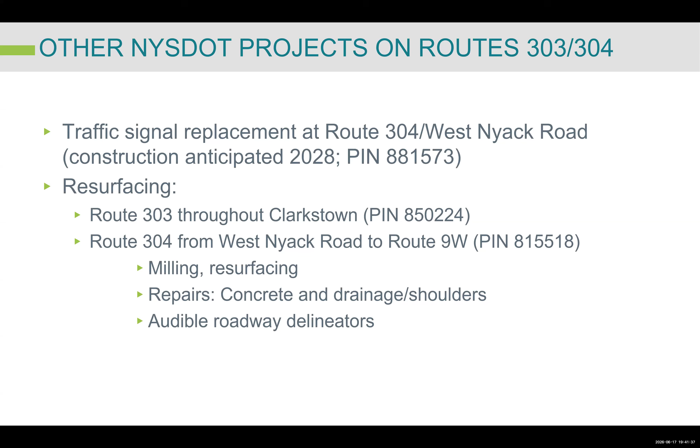And then towards the bottom, there's 2 resurfacing projects that are going to resurface nearly all of routes 303 and 304 throughout Clarkstown. 303, the entirety of Clarkstown, and 304 from West Nyack Road, which is where the freeway section coming up from New Jersey ends. So from West Nyack Road, all the way north, all the way up to Route 9W. Those will involve milling, resurfacing. There'll be asphalt surfaces at the end of that project. There'll be repairs to the concrete and drainage in some places. And what you'll see in some locations are what are known as audible roadway delineators, or what you may have thought of as rumble strips, either on the side of the roadway or in the center of the roadway. So that's also on your radar screen coming down the pike.

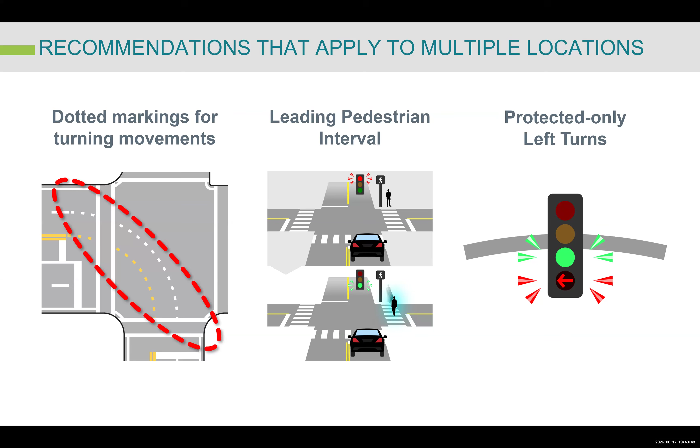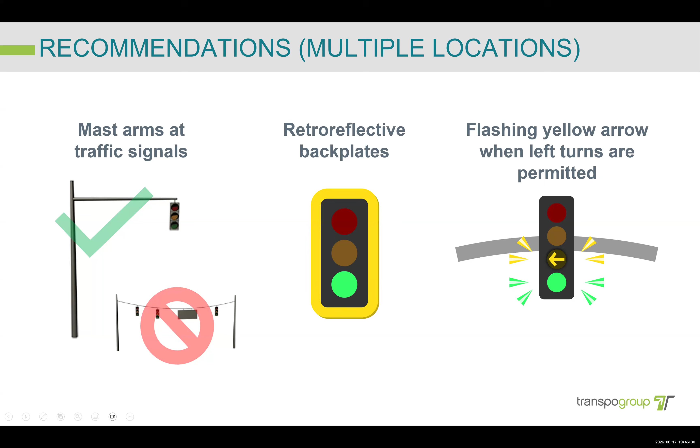Finally, over on the right-hand side, you're seeing these more and more at intersections across New York State. Flashing yellow arrows at places where left turns are permitted. So permitted left turns means you're seeing a green ball indicator and you as a driver can turn left across opposing traffic if it's safe. So you as a driver have to make a judgment whether it's safe, and these flashing yellow arrows tell the driver it's your decision. You make the judgment call when to turn left. And that also has a measurable increase in safety.

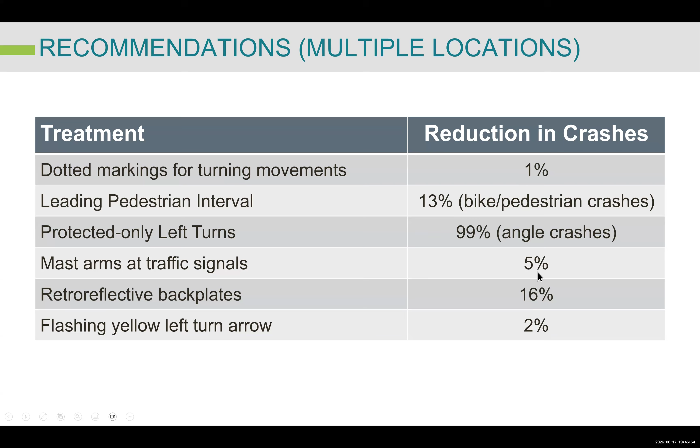Okay, a term you're going to hear again and again tonight is level of service. You'll even see the acronym LOS, which stands for level of service. This is how traffic engineers think about how congested a roadway, how congested an intersection is. And so just like if you're in school, you get a report card, an intersection gets a report card. And an A is the best and an F is the worst, but a little bit different than your school report cards. A D is actually pretty good.

So A, B, C, D is acceptable. And E and F means we have a problem. If possible, we'd like to address that problem. So anything A, B, C, even a D is sort of what we're shooting for, but an E or F is what we're attempting to avoid, mitigate, make better.

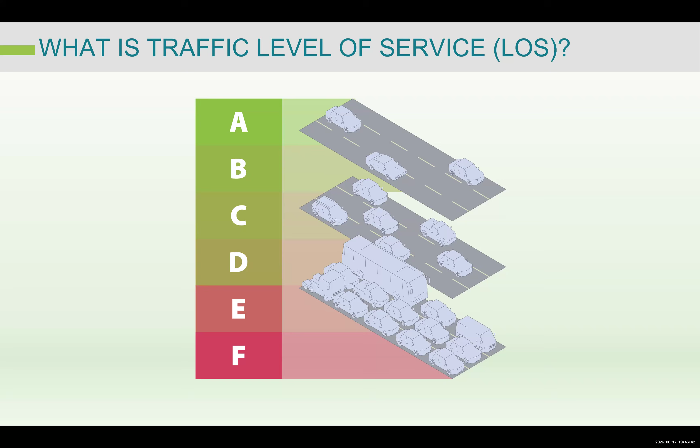So what a center median would do, there's pros and there's cons. I'm going to talk about the pros and the cons of everything tonight, but I wanted to highlight there's pros and cons of the median first. What a median would do, it prevents left turns both into and out of properties that line, in this case, Route 304, and also any minor streets where there's not a turn lane or something to break that median. So what this means is that if you would wish to turn left, either into or out of a property or a minor street, you're going to need to find a U-turn facility.

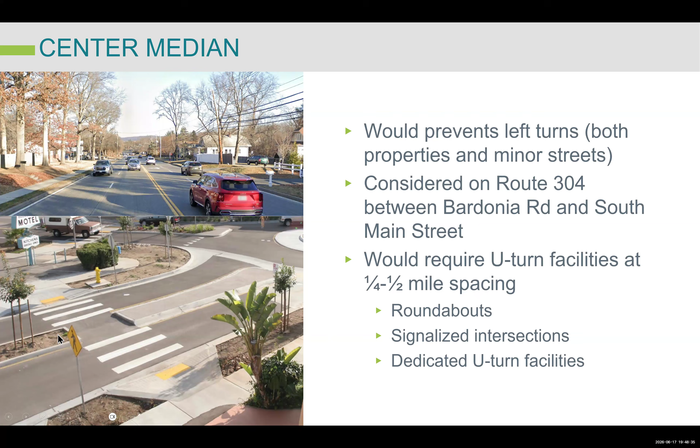Sometimes they are simply bricked or hardscape, as we say, concrete perhaps. Sometimes they're vegetated. It depends on the width. It all depends on the context. So center median is something I wanted to highlight. We'll come back to that when we talk about 304 shortly.

And then roundabouts. So I mentioned a bit earlier that we've been looking at roundabouts at a series of locations along both corridors. Every place we've looked at a roundabout, we've also looked at an option which is not a roundabout. Okay, so in no case are all our eggs in one basket with a roundabout option. But what I'd ask you all to do is understand this would be a change. There'd be a pretty substantial change to how traffic moves in these locations. There's pros and there's cons, there's advantages and disadvantages, and just have an open mind.

Listen to what we have to say about this. We're happy to talk further about it, but just keep an open mind because roundabouts do have a number of advantages. And the latest statistic that I'm aware of, approximately 250 roundabouts across New York State are under the jurisdiction of just New York State DOT. There's more under local jurisdiction, but there's about 250 and growing. Okay, so we have sort of 10 key aspects, if you're unfamiliar with how roundabouts work or how they perform.

First that I want to highlight: again, I said safety is sort of the guiding light of this entire study. Roundabouts are generally safer. They eliminate high-speed angle crashes like those left turn crashes that are really, really dangerous. It's one of the worst types of crashes. So with roundabouts, you end up with sideswipe crashes, maybe some rear-end crashes, but way fewer of those angle crashes, which are really dangerous and where lives are lost. Number two, you don't have a traffic signal. When there's a hurricane and power's out, the roundabout still works, even if the traffic lights in town are not.

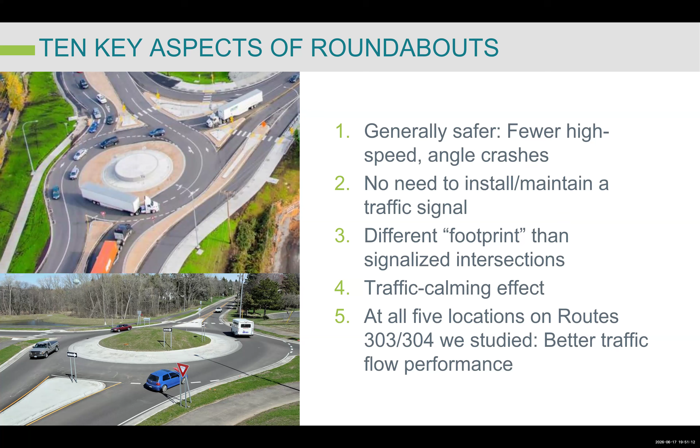And we've looked in detail at 5 locations, as I mentioned. At every location that we've looked, we get better traffic flow performance from a roundabout than from the best signal improvement option to compare it against. Okay, continuing with our top 10 list here. Number 6, it would be a pretty substantial change to the character of the roadways.

If you're interested in where else to find roundabouts in New York State, Route 67 in, I believe it's Saratoga County, just north of Albany. There's a series of roundabouts, one after another, right where Route 67 intersects with Interstate 87. Near Poughkeepsie on Route 55 in Dutchess County, there are 3 roundabouts within approximately a half-mile spacing. So they're a change in the character of the roadway, but you are seeing them for the reasons that we're talking about tonight.

Drivers need to learn how to navigate roundabouts, particularly if there's multiple circulating lanes inside the roundabouts. And at the locations we've looked at here, the traffic volumes are high enough that you would need more than one lane. These would not be simple one-lane roundabouts. You'll see that in many cases, there's 2 lanes for at least part of the roundabout. They can be established as gateway treatments, to communicate to travelers: now you've come into a place which is different than the place you have just left. Maybe you're entering into the hamlet of New City, or Valley Cottage, etc.

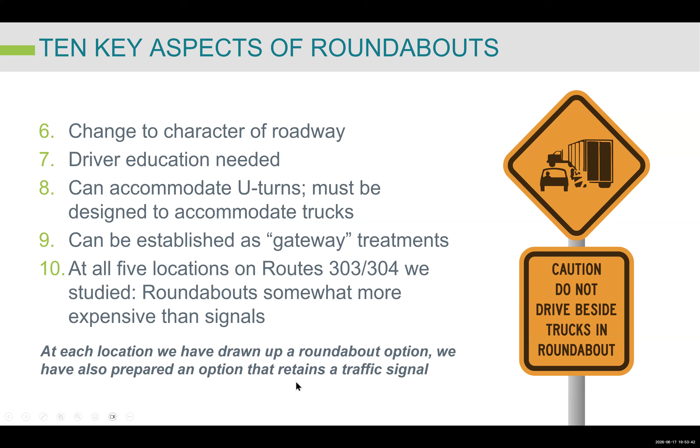Finally, at the bottom here, everywhere that we've looked at roundabouts, we found that the roundabout option has a delta in terms of cost. It's a little bit more expensive, in some cases substantially more expensive than the traffic signal alternative. So you get with roundabouts, but you also give with roundabouts. There's pros and there's cons. Just to remind everyone, once again, everywhere we're going to show you a roundabout, we're also going to show you a non-roundabout option.

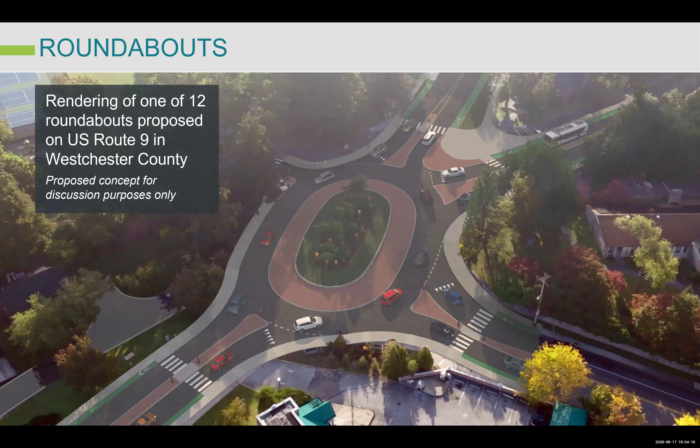Okay, what you've got here is a rendering. This does not exist yet. This is a rendering from a similar study, which was completed last year in Tarrytown and neighboring communities in Westchester County of US Route 9. And this is a proposed roundabout. It's a complicated roundabout, as you can see, 1, 2, 3, 4, 5 legs. So it's a complicated intersection. But just to communicate to everyone that the roundabouts that we're talking about here as possible future options are not different from what is being proposed elsewhere in the region and across New York State.

I'll explain in more detail when we get there, but there's this simulation of this location and for all of the other 5 locations on the website. So in the interest of time, we're not going to go through all 5 of them in the presentation, but I am going to direct you to the website. Have a look. All the videos are available up there.

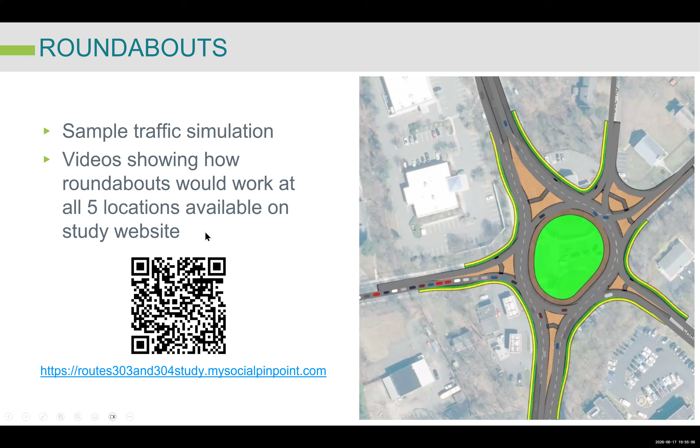Number one, the interchange. Some of the ramps are stop control. They have stop signs on the end of those ramps. There's very limited space to accelerate and decelerate as you're either entering or exiting one of the roadways at this interchange. So number one would be improvements to the length that you have to accelerate and decelerate. Again, a big safety improvement there.

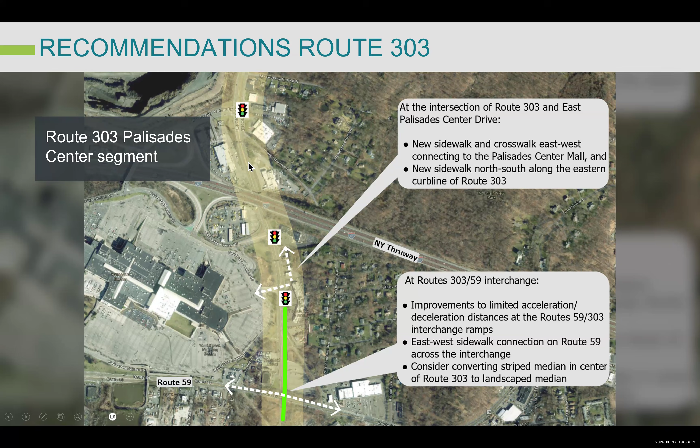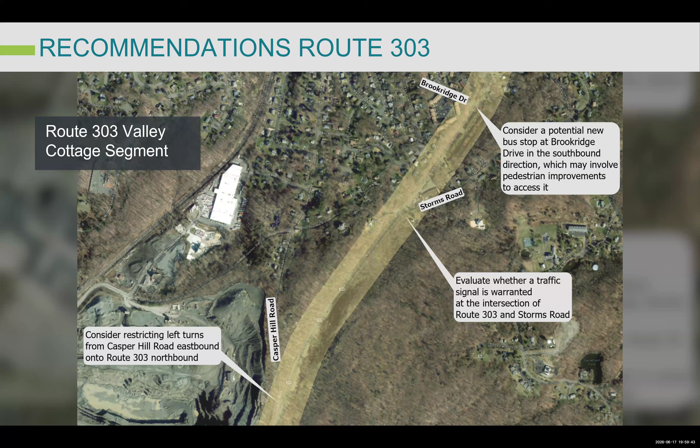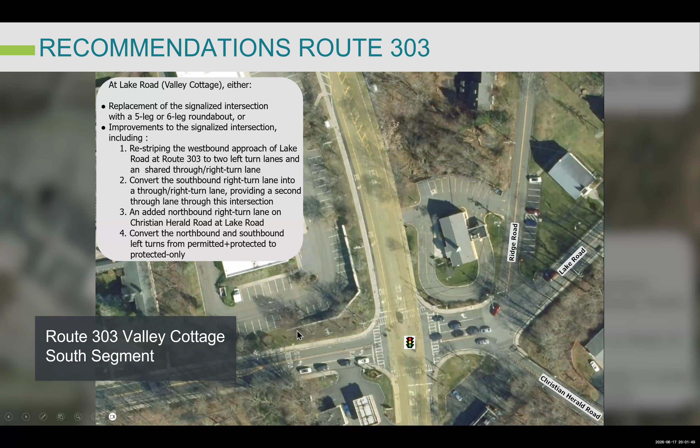You would not turn left any other time. Okay, so this is what that looks like. Let me walk quickly through this. So we have separate right turn and left turn lanes on Christian Herald Road. We restripe, not widen here, but restripe to get a second left turn lane going westbound to southbound.

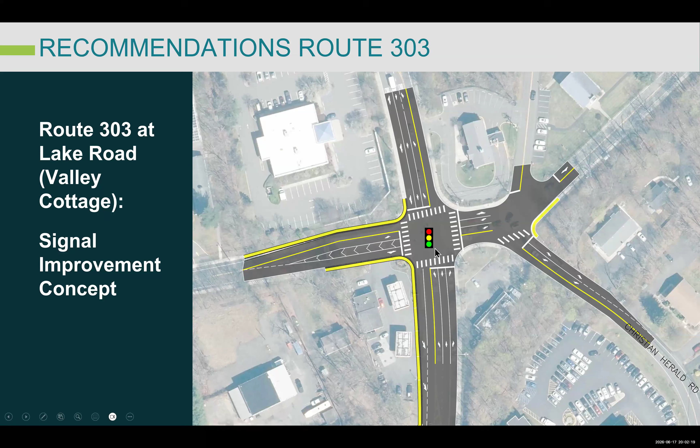We get a second through lane coming through the intersection. There's no widening here. There's a bit of widening here to get this second lane through. And we would not make changes to the final leg of the intersection. So this is what that would look like if we had just improved the traffic signal. Then our 2 roundabout options at this location. The first is the 6-leg roundabout option.

So again, we bring every one of these 6 roadways all together into one fairly large traffic roundabout. We have 2 lanes of Route 303 that carry through northbound, same thing southbound. And on the side streets, mainly it's 1 lane approaching. And again, this brings everything all together, but because it's bringing everything together, it's larger than what I'm going to flip to now, which is the 5-leg roundabout concept.

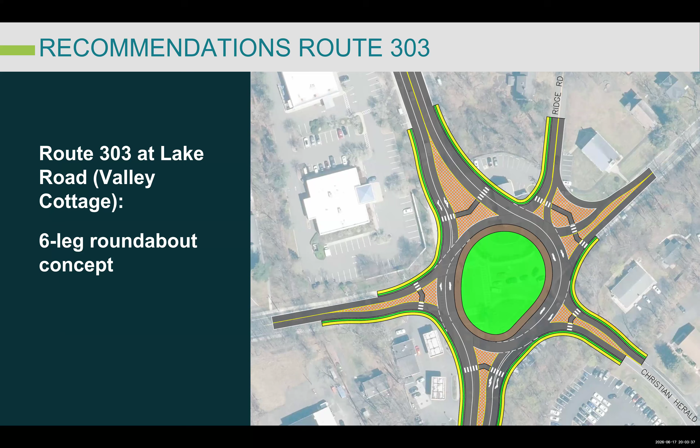Then you would not have a roadway right here. Therefore, we only need a 5-leg roundabout. It's a sort of cleaner roundabout compared to the one you see with 6 legs. Okay, so those are our 3 options we developed for this location. Now I want to briefly talk about how they would perform. So there's a lot of information here.

What I want to highlight is we began at each location looking at what is the level of service, how congested is it today? It's a D. We looked at what would happen if we do nothing, we leave everything as is and just grow traffic out to the year 2050. It would become an E at 60 seconds of delay, or 64 for a typical vehicle. Then the signal improvements option would take that E, bring it back to a D, somewhat comparable to today's level of congestion at this location. And we would get a reduction of approximately 23% in crashes at this intersection.

And our 2 roundabout options would bring us to a much better level of service, to a level of service B. So D is good, B is also good, but B is better than D. And that's what I mean when I say that at the locations that we looked at, the roundabouts just provide better traffic flow. This is during the peak hour, the busiest hour of the day, but it would also be true during the less busy hours of the day as well, because you wouldn't stop at a red light. There's no opposing traffic. You would enter the roundabout and proceed.

In terms of construction costs, there's been a lot of construction cost inflation in the past several years. Construction costs are fluid, but what I do want to highlight here is that at this planning level, we can say that the signal improvements would be a lower cost improvement at this location. The 2 roundabouts have higher costs, and actually that 5-leg roundabout would have the highest of the costs of the options here. And the reason there is because of the rerouting of Ridge Road to this new location further away from the main intersection.

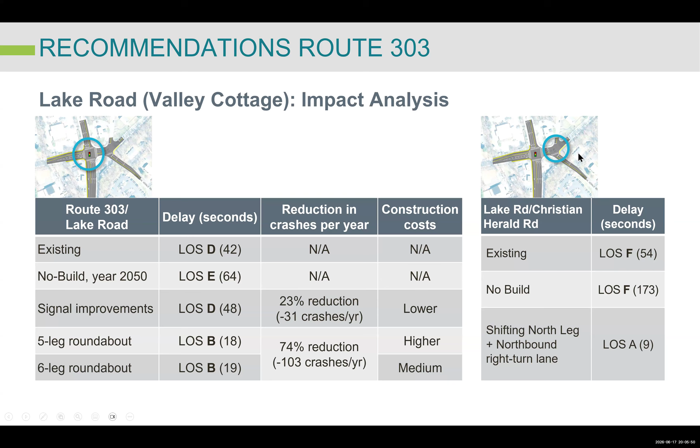Over at Lake Road and Christian Herald, we have an LOS of F today, which is the worst. It's going to stay F and get even worse in terms of delay, how much waiting you'll do. But if we move that north leg of Ridge Road and we add the right turn lane on Christian Herald Road, we go all the way from an F to an A. So those two improvements, not at the main intersection, but just at Lake Road and Christian Herald Road, have a lot of potency to improve traffic conditions at this location.

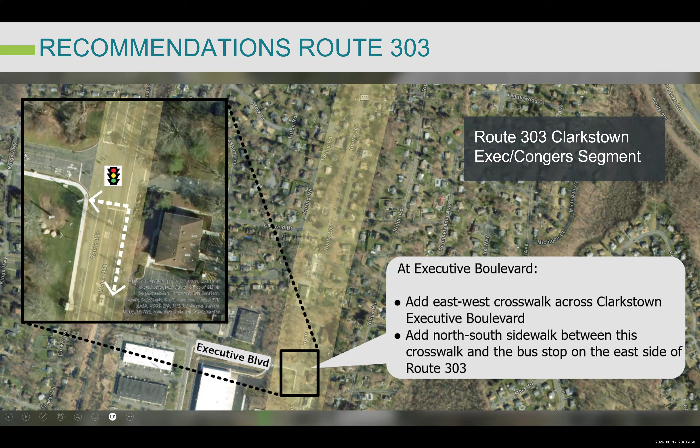Okay, continuing further north on Route 303, we're past Executive Boulevard. We're now at Gilchrest Road and Highway Avenue. There's, I believe, a community center over to the west, Congers Lake. Okay, at this location, we are recommending a sidewalk, actually a sidewalk that would run continuously through this section, further north of this intersection, along the east side of Route 303.

We're recommending crosswalks across all four legs of this intersection. We're recommending a connection; there's a bus stop up here, a bus shelter. So a sidewalk connection to that bus shelter from the intersection. And then a continuation of the sidewalk along Gilchrest Road to the west, connecting to the community center. So right now, you don't have a safe way to walk on this side of the road to the community center. This would provide that along Gilchrest.

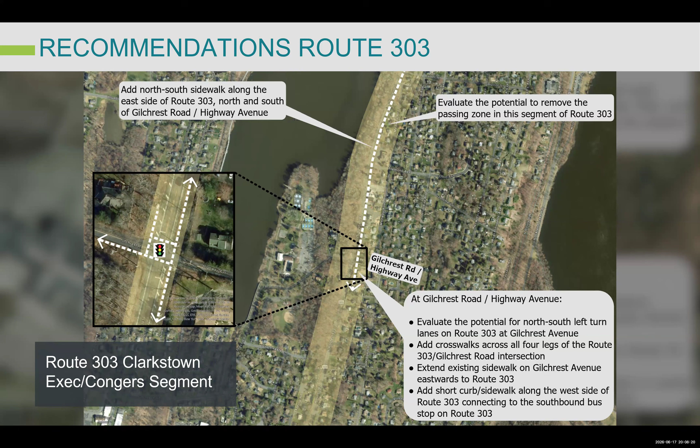Further north, past Gilchrest and Highway Avenue, we were a little bit surprised the first time that we got out and visited the corridor. You have a passing zone in this stretch of Route 303. That passing zone would have been implemented many, many decades ago when the land uses were very different. The amount of driveways were very different. The traffic volumes were very different. And so, you'll have to do a detailed engineering study, but what we're proposing at this point is to reconsider whether a passing zone is appropriate. Really, it's here, and you're also going to see the same thing further north along Route 303.

Okay, so we're moving further north now once again, and now we are at the top of Congers Lake. We are at Lake Road in Congers. And here what we are suggesting is a sidewalk connection to a bus shelter along the west side of Route 303. Crosswalks where there are no crosswalks across all three of these legs of the intersection.

And then what you see in green, this dashed arrow here, would be a cycle lane, a way to cycle safely east-west from Congers Lake over towards Route 9W. So our remit was we focused on the 303 corridor, but we identified this as an opportunity for a location to improve east-west connections for cycling as well.

Finally, I want to mention up here at this intersection, we looked at various options here that would take left turns away from this intersection, move them up to another intersection with Hemenway Lane, which is the next street to the north here. We've also looked at the option of adding left turn lanes. So at this intersection, there are no left turn lanes north and south along 303. You come to the traffic light, and if you're turning left, you are in the through lane. So the recommendation here is consider both northbound and southbound left turn lanes at this location.

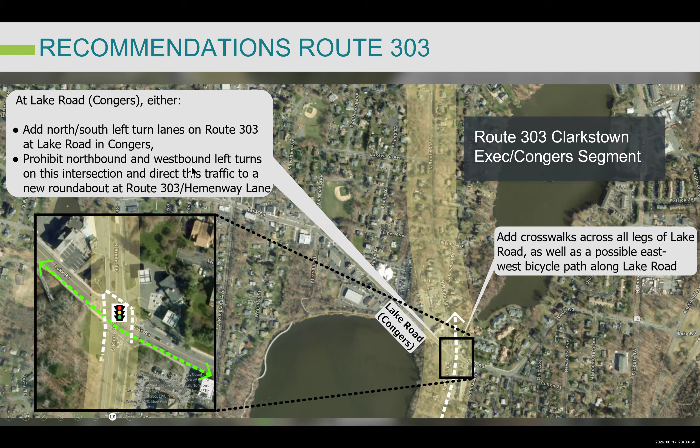Okay, then we are nearly done with 303. We're at the very north end of Route 303. There's a lot going on here. There's even some land use proposals that many of you may have heard of. In this part of Route 303, we have some light industrial uses. So this is the Congers North segment.

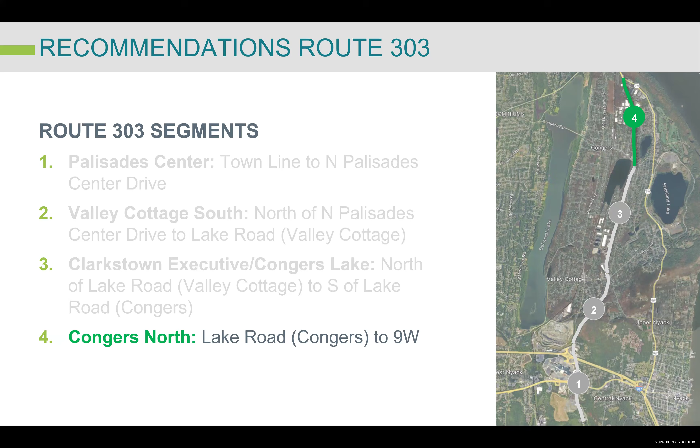First item I want to highlight here is we get to an intersection with Hilltop Road and Randi Lane. Hilltop Road to the left, to the west of Route 303, Randi Lane to the right. Here you do have a crosswalk. But what we're recommending is to consider upgrading that crosswalk to what you see here. This is called an RRFB, a rectangular rapid flashing beacon.

What that means is, as a pedestrian, you press a button to cross that crosswalk, and immediately, without delay, strobe lights start flashing yellow to tell drivers, not only is there a crosswalk there, but there is someone right now crossing that crosswalk. So that's the type of treatment that we're recommending you consider at Hilltop and Randi, again, to make it safer and more accessible to get across the state highway.

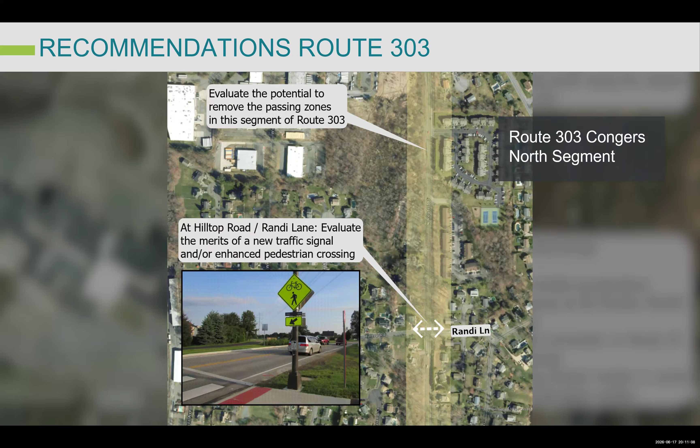As we get further north, once again, we have more passing zones on this stretch of Route 303. We're recommending reconsidering whether those passing zones fit the current land use context. You have condominium development up there, a lot more land use, a lot more development than the last time this roadway was considered.

Okay, now we're up towards the very final stretch of Route 303. We're at Brenner Drive. There's a painted median on both sides of this Brenner Drive intersection. We're recommending, like some other painted median locations, consider a landscape median. It's a beautification initiative, a stormwater management initiative, a sustainability initiative. So consider that there. There would need to be further study, but we're recommending to evaluate the merits of a traffic signal at this location. Currently, there is no traffic light at Brenner Drive.

And what you see in white along the east side of Route 303, this would be a recommended sidewalk connecting this residential neighborhood down here with Hemlock Park just to the north. So a safe way to get up to Hemlock Park, not walking in the shoulder, but walking on a sidewalk. At Brenner Drive, we would also recommend considering crosswalks across the various legs of this intersection. And there is no bus stop immediately in this area, so we'd recommend considering a shelter, considering a stop location to serve these major employment sites.

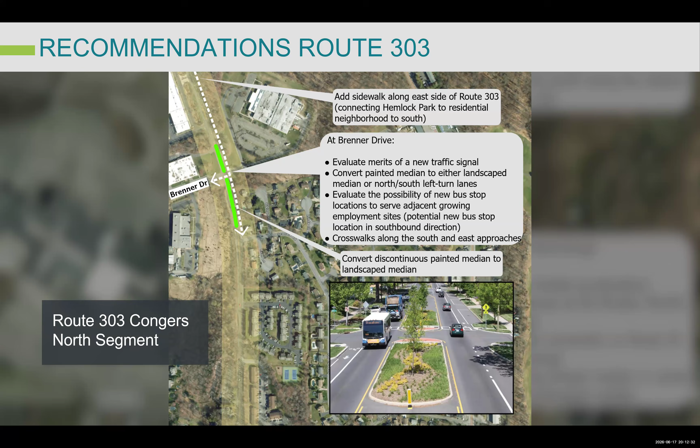Okay, continuing up towards Hemlock Drive, Meola Road, and ultimately this is Route 9W over here, so the intersection with 9W. I'm at Hemlock Drive, and we're aware there was another fatality earlier in 2026 at Hemlock Drive. We're recommending here sidewalk on the east side, crosswalk, and then sidewalk on the west side to get from a bus stop into this employment center.

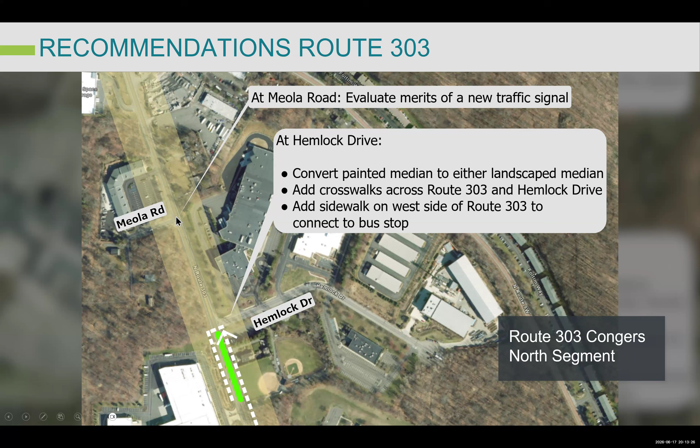Over at Meola Road, which is the final intersection I'll discuss on Route 303, there's development that's proposed, Cedar Corners, in this area. I know that that's under review by the town at the moment. So our recommendation is consider this as a location for a potential traffic light if you're going to provide access to more intense development at that location. Okay, I'm going to pause for a moment, and then I'm going to move along to Route 304 and talk about what we're thinking on 304, going from south to north once again.

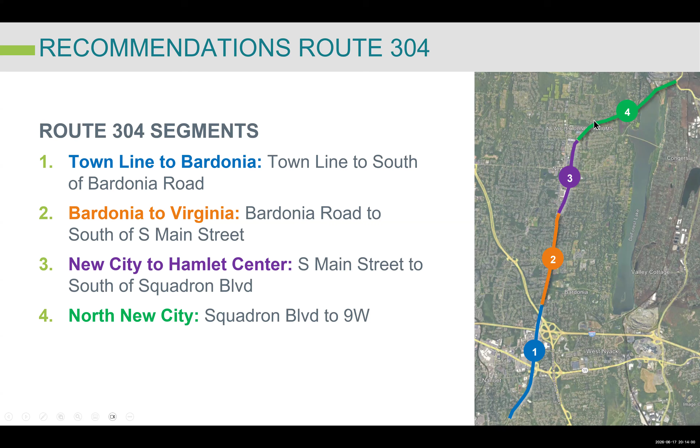Okay, so our 4 segments of Route 304: the town line on the south to Bardonia, where we begin with the freeway section, and then we transition at West Nyack Road into the surface roadway. Bardonia to Virginia, which is, in my opinion, one of the more challenging sections of these roadways. We'll go through the New City Hamlet Center, and then finally North New City, all the way up to the connection to 9W. Okay, so we're going to start out all the way at the south once again. What you're seeing right here, these are the ramps that connect down to Route 59. West Nyack Road, again, 3 fatalities at West Nyack Road.

At West Nyack Road, we are not making major recommendations here because we know that there's a state study coming down the pike. What we are recommending is consider sidewalks along West Nyack Road, consider a crosswalk across West Nyack Road north to south. And we think that the state will be evaluating the merits of protected only left turns north and south. Currently, you can turn left, north and south, when you have a green ball. It's a driver judgment decision. Our analysis is that you may ultimately decide that it's safer to convert to protected only left turns, but we're not making that recommendation. That's to come as a piece of future work.

Moving further north, there's a series of car dealerships on Route 304 here. Up at Demarest Mill Road, we're recommending sidewalks along Demarest Mill Road to connect some of these commercial properties over to Route 304. And there are right turn lanes as you approach this intersection, both northbound and southbound. They don't get a ton of use. We've counted the traffic out there. So we think that there's merit in rethinking those right turn lanes, putting them into a shared lane with the through traffic. And that allows you to narrow down what's currently a very, very wide roadway to cross if you're a pedestrian, to make it faster and easier to get across on foot.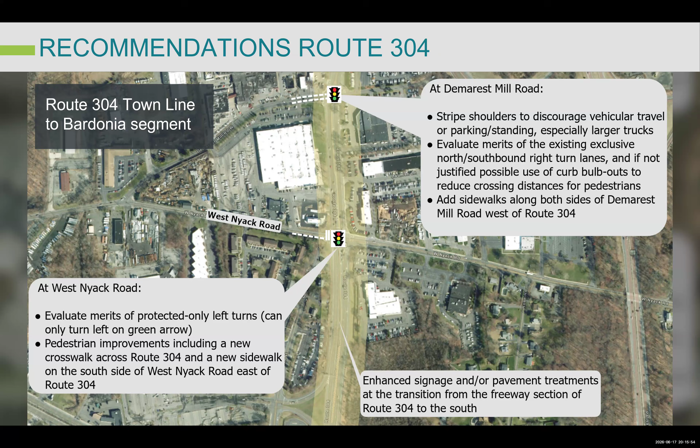We would do this with what we call curb bulb outs. That means at intersections where we have a pedestrian crossing, bringing the curbs closer together. Traffic lanes can get through, but there's not a wide shoulder at those locations.

Okay, moving further north, here we are near Village Green and Dustman Lane. This is also a challenging location. So here, there's busy traffic. It's a 5-lane section. There's 2 lanes in each direction. There's a center turn lane. There's businesses. There's condominium developments. There's a lot of activity in this area.

However, neither at Village Green, nor at Dustman Lane, nor anywhere else is there an optimal place to place a traffic light. We didn't find a single location where we could justify combining access into these multiple properties, these multiple streets, into a single traffic light.

Therefore, a recommendation here, this is a long-term recommendation which would take many years to come to fruition, is to consider, as these individual properties redevelop, some type of a district approach to access so that instead of every single property going directly onto Route 304, there's shared access, and maybe then you have the traffic volumes that can support a traffic light.

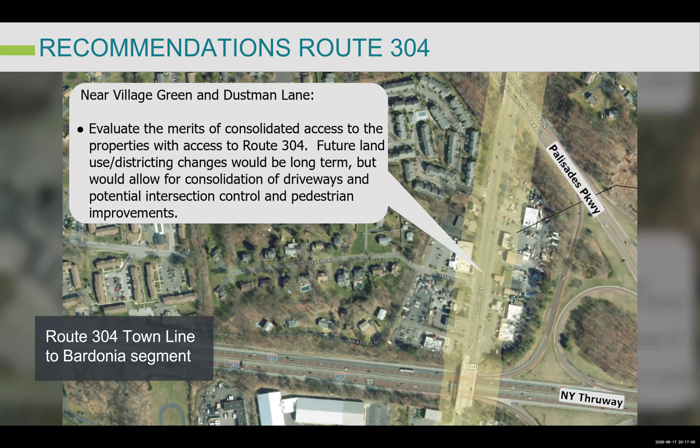You don't see a drawing of improvements to the traffic light because at this location, we would improve the traffic light in various ways without changing the pavement. So we wouldn't be adding lanes or changing any lanes. We would be simply changing how the traffic light works, those mast arms, etc.

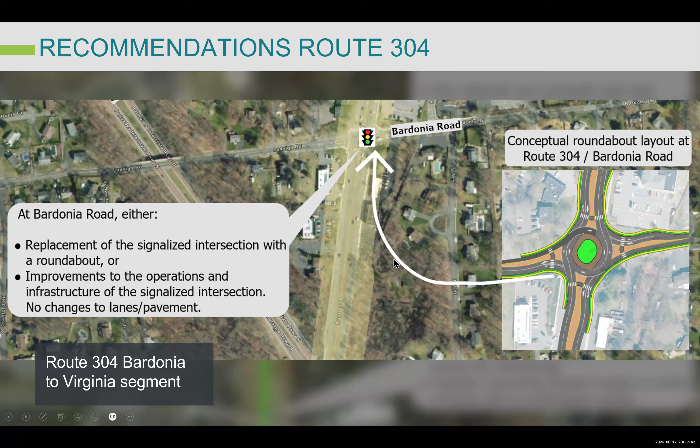Okay, so here's what that roundabout at Bardonia that we've drawn up would look like. CVS over in this corner of the intersection, 2 lanes through the intersection, both along 304 northbound and southbound, 1 lane through eastbound and westbound. So if you're going from 304 north to go west on Ludwig Road, you would be in this lane. You would travel through like this. Okay, so that's an example of the trajectories that you would follow as you go through the intersection.

In terms of safety, you get a safety improvement from those various improvements I talked about earlier, the reflective backplates, the yellow flashing arrows, etc. But you get a much larger benefit in terms of safety from a roundabout just because every driver is forced to slow down as they enter that roundabout. And here at this location, the roundabout clocks in as the higher cost of the 2.

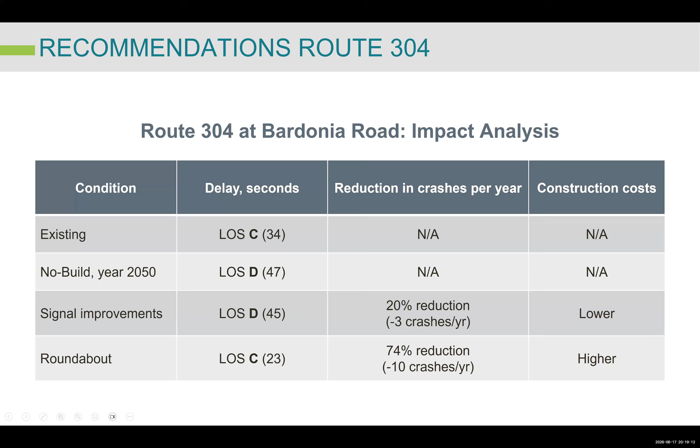It would be a trailway. It might be something like a 10 to 12 foot wide trailway. There's actually a power line right of way, a strip of land that carries electric lines, and that's what would be the host for this trailway. So that's the first thing that I want to highlight, a brand new connection for anyone that lives in this neighborhood over to Germonds Park without having to loop all the way around to the other side of Germonds Park.

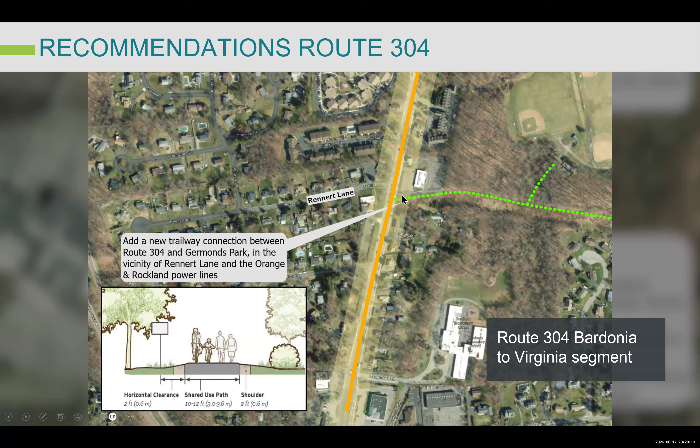Next thing I want to highlight in this section, you see in orange, that line running right down through the middle of the roadway. This is where we are recommending that you consider a median. So again, the downside of a median is that property access becomes more difficult. You can only turn right into access properties or right to leave properties. You're not turning left. It's more dangerous to make those lefts, so the median simply prohibits it.

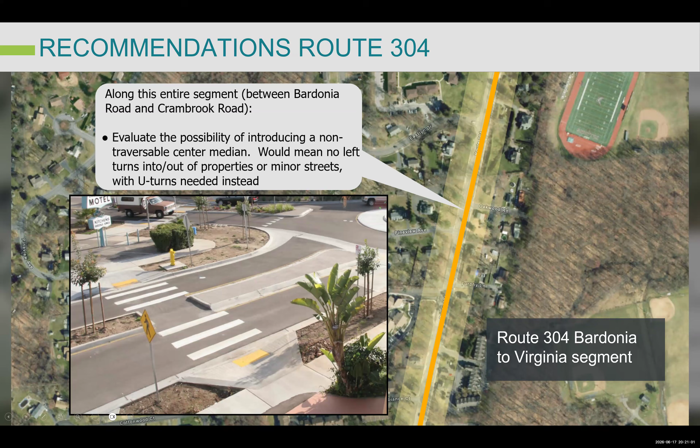And instead, you're going to some sort of a U-turn facility. Either it's a roundabout or it's a traffic signal that can accommodate them. Or in a moment, I'll show you another way that you could accommodate U-turns. But this has the downside of what it means for access. It has a big, big advantage in terms of what it means for safety. Okay, so in this section, there's no turn lanes. You're turning left from the left through lane.

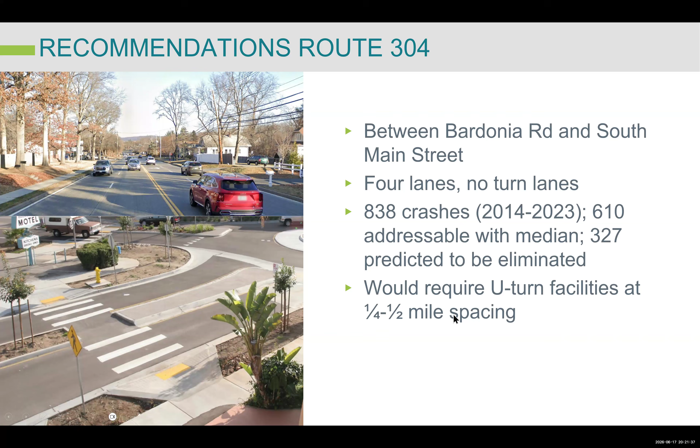We counted a total of 838 crashes through this stretch where we're proposing a median. Out of those crashes, approximately 600 would be addressable, are the types of crashes that a median would address. And approximately 300 is forecasted to be eliminated. So something like 300 crashes avoided of those 800 that we saw. So pretty powerful in terms of safety, and that would be the motivation. So again, you'd want U-turn facilities. The standard is something like a 1/4 mile to a 1/2 mile spacing. Could do it with roundabouts, could do it with traffic lights.

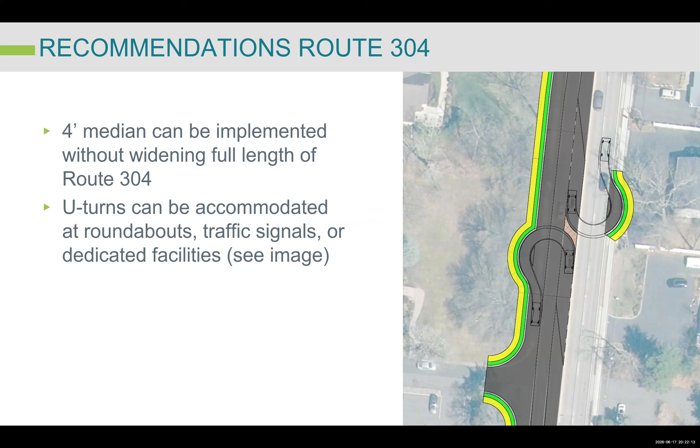Here is another way that you could do this. And if you want to see something that looks like this, have a look in Orangetown near Erie Street. Median was introduced with exactly this sort of a U-turn treatment. It allows passenger cars to turn around. It's sized only for passenger cars. So if you're a truck or anything bigger, you have to find some other way to make a U-turn because otherwise this would be a much bigger circle. But this would be another way to provide for U-turns without introducing roundabouts or without making the traffic signals wide enough to allow U-turns.

Okay, so we are now at Germonds Road. This is the next major traffic signal along Route 304. We've passed Monterey Gardens. We're now at Germonds Road. At Germonds Road, we're proposing one of two things. Either it's a roundabout or it's the signal improvements you see in the drawing on the top left. So the roundabout, there's a lot of lanes. It's big. It would take a lot of land. We've adjusted the route. We've shifted around to attempt to minimize impacts to properties, but it's unavoidable.

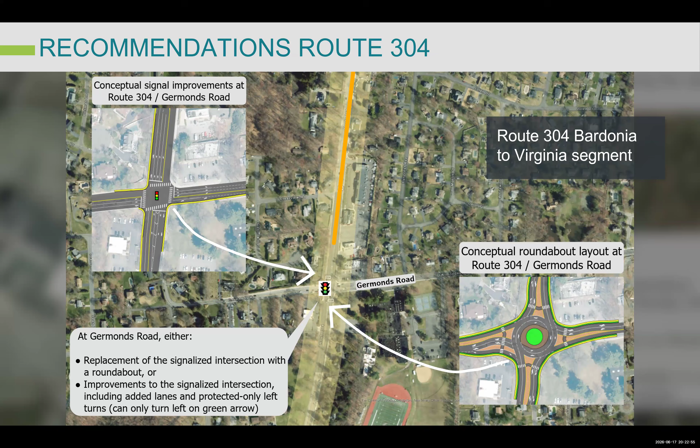It would take space. The traffic signal improvements, let me jump to that and I'll walk through what we're talking about here. First thing is we analyzed the left turns at this intersection and came up with a recommendation to make all 4 left turns on all approaches protected only. So you only turn left when you have a green arrow, not any other time. This is a trade-off as well, lots of trade-offs. The trade-off here, much better for safety, but it's a bit more delay because you're always waiting for that green arrow.

So what we would change on the ground here, a second left turn lane going southbound, coming from New City and turning to go towards the schools, towards the east on Germonds. So right now you have 1 left turn lane, there would be 2. Second change would be a second through lane coming down the Germonds Hill, approaching the intersection and going through the intersection just far enough to get through the intersection and then merge back down to a single lane. So this would get 2 lanes through the intersection, additional turn lane for southbound traffic, and that would address the additional congestion from making all these left turns safer through protected only.

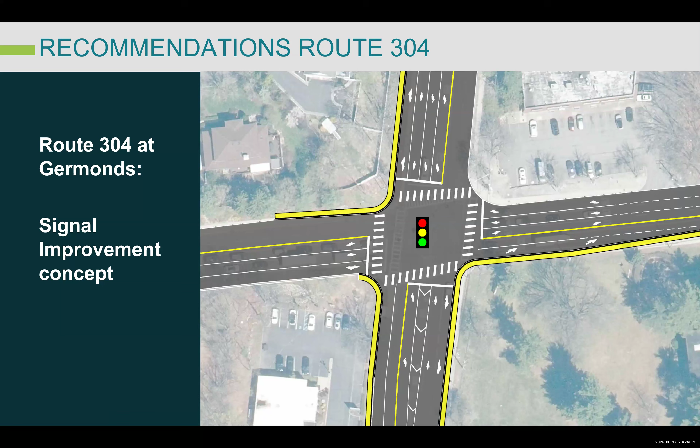And I want to flag for everyone, we're aware that at this location, there's lots of school bus traffic, there's lots of truck traffic, so we're really aware that there's a lot of special conditions of traffic at this location. Okay, the roundabout that we've drawn up at this location, there's commercial properties on the northeast, southwest. There's Albertus Magnus High School to this southwest, southeast side. Then there's homes, there's residential properties to the northwest.

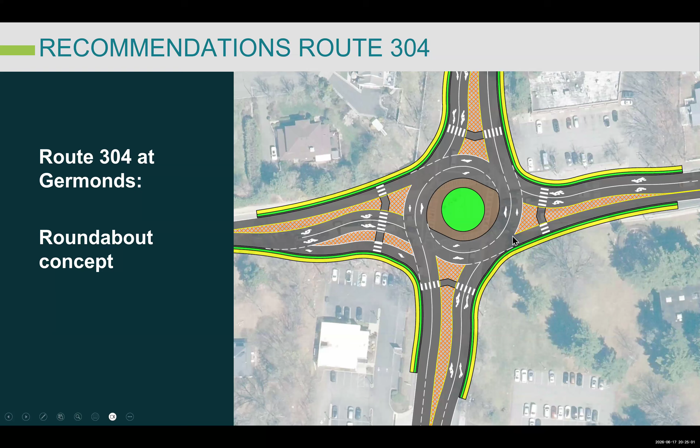The drawing here respects as best as possible, as best as we could make work with the design standards, those residential properties. You can see the fences at the rear of these properties. So we've stayed on the street side of those fence lines. We've shifted as far as we could towards the areas where it's less intrusive. But you can see just from the drawing, it would take quite a bit of space. It's a bigger footprint than the traffic signal improvements would involve.

Okay, in terms of performance, you're at a D today. It would be an E in the future if nothing is done. If the signal improvements are made, you would still be at an E, but you'd be a somewhat better E. And with the roundabout, traffic would flow much better.

So the roundabout here would provide much, much better traffic flow, but it's got that trade-off, as you've seen. It's physically a lot more real estate. In terms of reduction in crashes, you do get a big reduction here from the signal improvements because of that conversion to protected only lefts. You're eliminating many of those angle, very dangerous crashes. So you do get a big reduction from that.

You get a slightly bigger reduction from roundabouts, but comparable, I think it's fair to say. And the roundabout here would be more expensive, and the signal improvements would be somewhat less expensive. And the way to think about all of the costs that we're talking about for these improvements, single-digit millions of dollars, something in that range, maybe on the higher end for some, maybe on the lower end for others. If we're just changing the mast arms or just changing the infrastructure without new pavement, we're probably under $1 million. Those are sort of the range that we're thinking about.

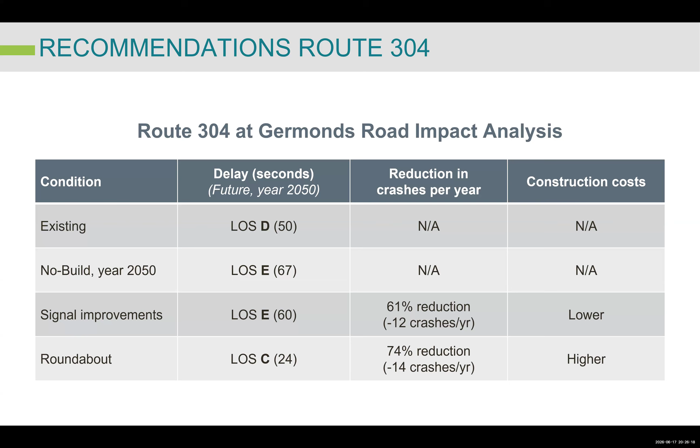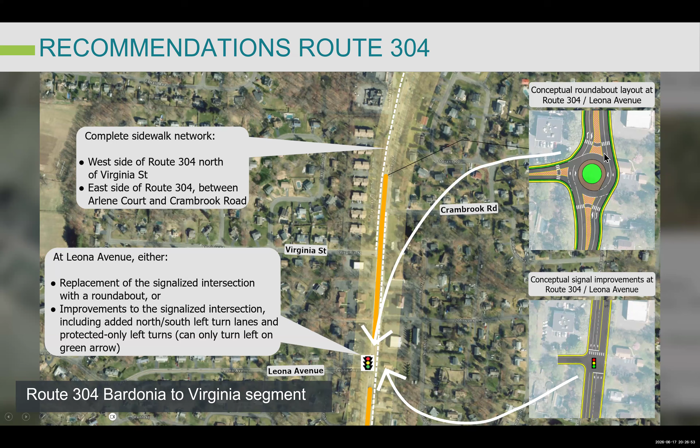Okay, moving further north on Route 304, we are at Leona Avenue, and at Leona Avenue, you have a traffic light currently. But if you wish to turn left from northbound traffic to go onto Leona Avenue, you have to do that from a shared lane with through traffic traveling. This is a 45-mile-an-hour section of Route 304. So the drawing here would show an added turn lane to separate that left-turning traffic out from through traffic. That's what this would do. Or the roundabout alternative, I'll show in a few moments what that would involve.

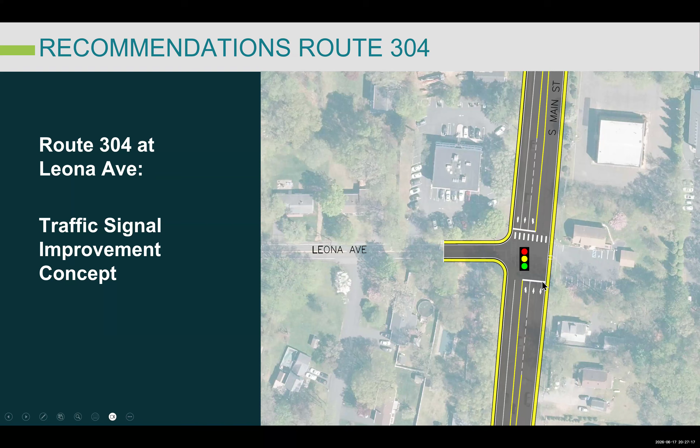Signal improvement first. You can see we have an additional turn lane going south, really just into this one property. This is a dental office. And then we also have going northbound, really the motivation here is get this new left turn lane, pull it out separate from through traffic. And the roundabout option here, once again, you can see it takes up more space. So here we are not interfering with the building. Here we are. So more space needed if we were to have a roundabout at this location at Leona. It would provide the ability, if you were to have that center median, for U-turns to allow that center median to be there.

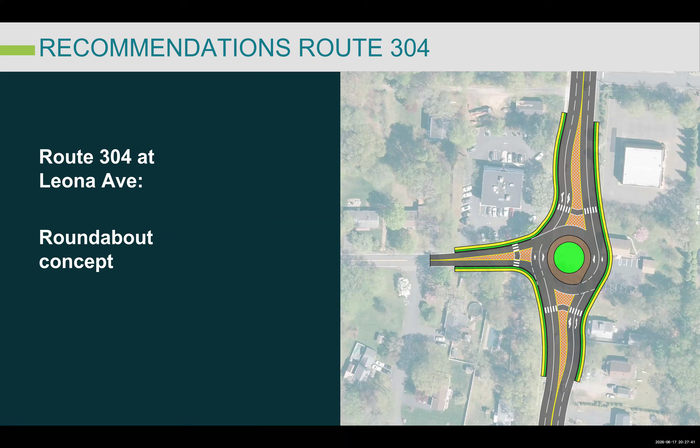Okay, what does this mean? Well, in terms of traffic flow, it's straight A's across the board. In the future with the signal improvements or with the roundabout, straight A's everywhere. So the issues at this location really aren't congestion. The issues are safety. So at this location, you get something like a 55, 56% reduction in crashes from adding those left turn lanes, northbound and southbound, and you get something like a 3/4 reduction in crashes from the roundabout, which again is more space. The roundabout is also more expensive here. The signal improvement is somewhat less expensive.

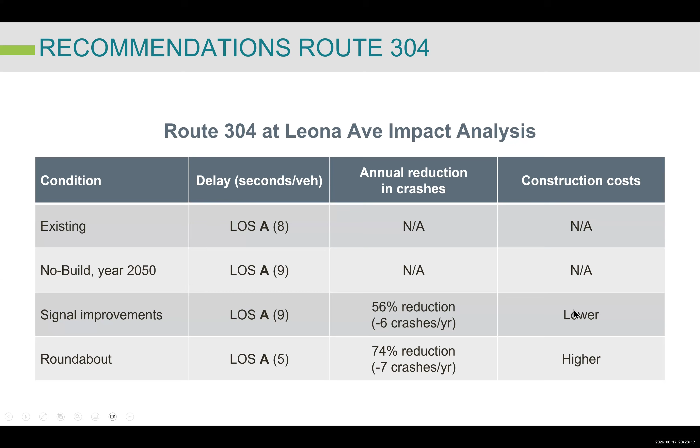Okay, continuing further on 304, we are at the New City Hamlet Center location. So here, South Main Street splits off, and we have South Main Street separate from Route 304 in its own alignment to the east. Okay, we're at Laurel Road. Currently, southbound left, so as you go southbound on Route 304 and you turn to go east on Laurel Road, you can make that turn as a permitted left turn. And we're recommending here to study that, evaluate the merits of converting that to protected only, again, for safety reasons.

This is the point of transition from a 45-mile-an-hour speed limit up to a 55-mile-an-hour speed limit. Traffic is moving very fast through this area. And through this entire area north of Laurel Road, the speed limit is 55. It's a pretty complex study of speeds and roadway context to recommend a speed limit reduction. Here, we're recommending that this study be undertaken of reducing that speed limit north of Laurel from the current 55 to either 45 or 50.

Final item that I want to mention in this stretch of 304, there's a traffic light at Laurel Road. The next traffic light is further north at 3rd Street, and we're recommending at several locations, the one highlighted here is Elinor Place, considering adding additional points of access connecting Route 304 to the neighborhood to the west. And one of the reasons for that is it better distributes traffic rather than concentrating traffic at a smaller number of locations. And you may be aware that there's been a zoning change in this area of New City. So if there's more development, then you'll have additional traffic volume, and that would help to distribute that traffic better.

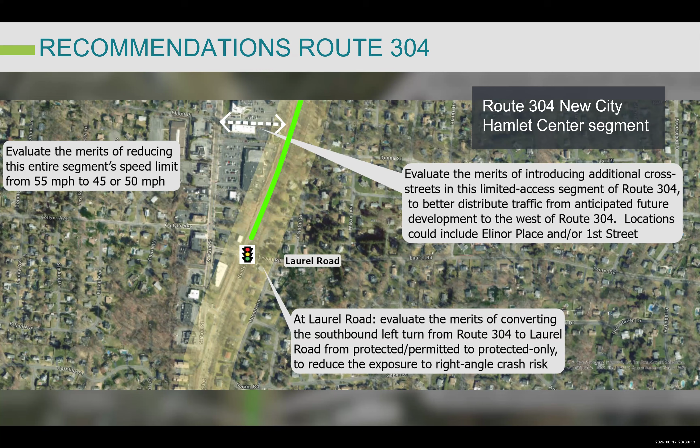Okay, continuing up to the 3rd Street traffic light. So here we're recommending there's shoulders on both sides of Route 304 here. We're recommending just at the intersection to pull the curb lines together. Curb bulb outs is the term. Possibly a refuge, a space in the middle between the northbound and southbound directions of Route 304 that would allow a pedestrian to pause if they needed to pause after crossing half of Route 304 before they cross the rest of it. It's a big wide road to cross. So we're recommending those as pedestrian improvements at 3rd Street.

One of the fatalities that we've looked at was a wrong way crash from a driver who turned the wrong way onto 304, and it was a head-on collision. There's several locations where there's right in, right out access points. We're recommending to consider closing some of those access points to eliminate that risk of wrong way driving in this stretch of 304.

Last thing I want to highlight here before we move along to Congers Road, what you see in green, right now you have that guide rail median that runs through the center of the roadway. We're recommending that you consider converting that median into a green median. Again, the landscaped, could absorb stormwater rather than the hardscape that it currently is.

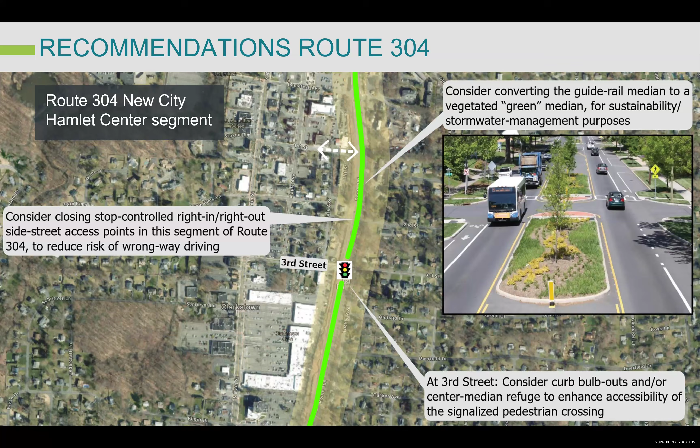Okay, now we're at Congers Road, and Congers Road is the final of our 5 focus areas where we've drawn detailed drawings and we've done a detailed impact analysis. We've got 2 options here. One is to make the traffic signal, the traffic light, work better. The next is to convert it to a roundabout.

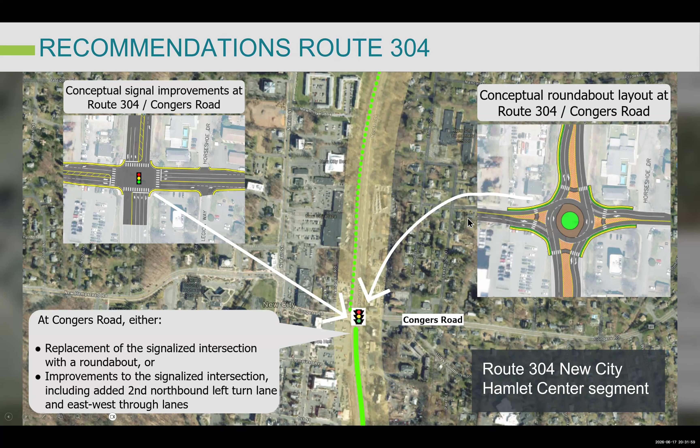Okay, so this is what it would look like if we improved the existing traffic light. First, going northbound, right now there's 1 left turn lane to go north from 304 to west onto Congers Road. We would add a second, so there would be 2 left turn lanes where there's currently only 1. We'd also add additional through lanes, so we'd have 2 through lanes in the eastbound direction and 2 through lanes in the westbound direction. So we'd make Congers Road itself right at the intersection wider. And as you see, these would neck down pretty rapidly on both sides of the intersection, back down to 1 lane in each direction.

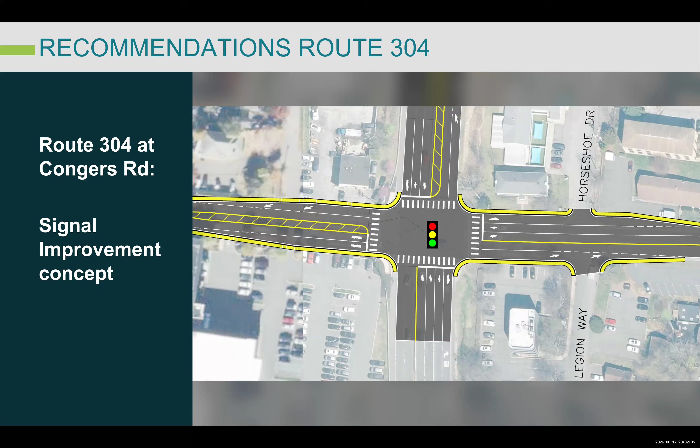The roundabout option at Congers Road: 2 lanes through on Route 304 northbound, same thing on southbound, only 1 lane through in the east-west direction. And then I'll talk more about this in a few moments. We're recommending that you consider a recreational trailway connection that could be built to the standards of the Empire State Trail, if anyone has been on sections of that across New York State. That would connect further north from here along 304, and it would terminate right at this intersection, connecting you in to the New City hamlet.

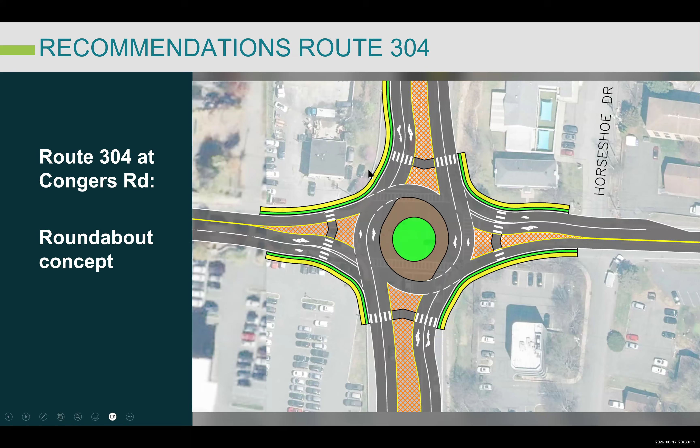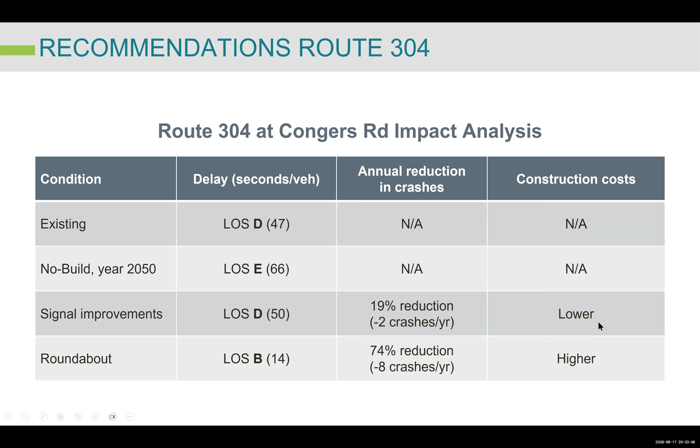How the options at Congers Road would work: we've got a D in terms of traffic congestion out there today. It would become an E through traffic growth if nothing is done out to the year 2050. The signal improvements would bring you back to more or less where you are today in terms of traffic flow, and a roundabout would be quite an improvement. It's a B. You can see the seconds of delay, which is how we measure this, would be quite a bit lower for that roundabout. In terms of safety, the roundabout performs best here. Signal improvements improve safety, but not as much as a roundabout would. And the roundabout would also have a higher cost at this location.

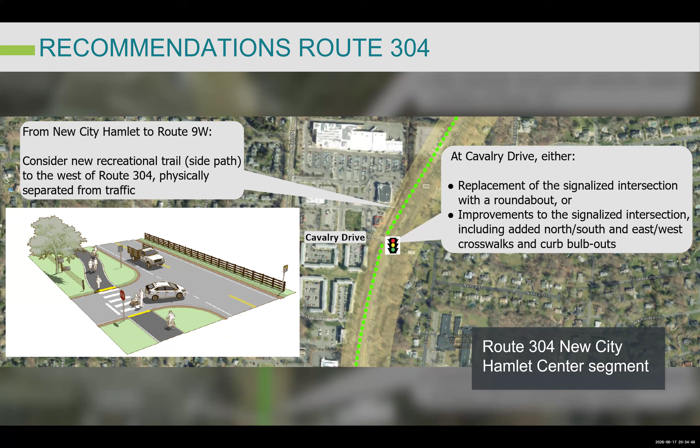Recommendations here: consider either a roundabout, or if we're going to keep the traffic signal, improving pedestrian access by putting crosswalks across Route 303 or 304, and also those curb bulb outs to bring the curbs closer together, make it easier and safer for pedestrians to cross.

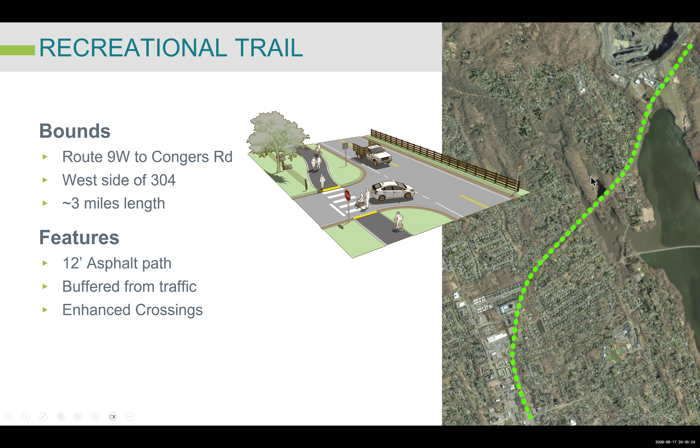So this trailway that I mentioned a few moments ago would run all the way from Congers Road, past Cavalry Drive, past Squadron Boulevard, past Phillips Hill, all the way up to Route 9W. It'd be a 3-mile stretch. 10, 12 feet wide would be the dimensions. It would be physically buffered from traffic. So in this area, we're not talking about a sidewalk. It would be separated from traffic. You would have crossings that might look something like this. And this would be, again, similar to what you see in other parts of the state called the Empire State Trail.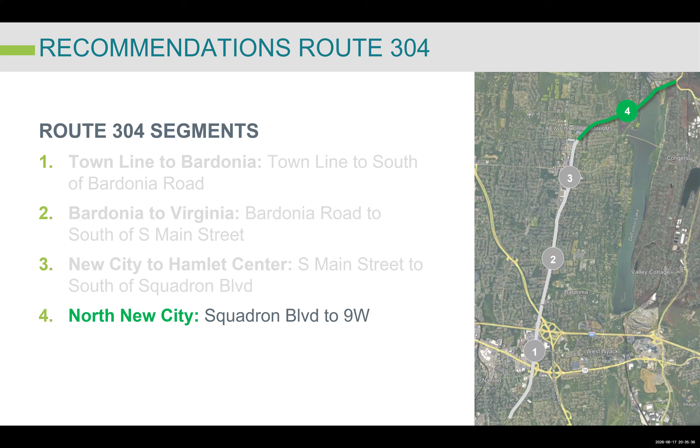Okay, so after Cavalry Drive, we have Squadron Boulevard. At Squadron Boulevard, similar to Cavalry Drive, either a roundabout option, replace the signal, or keep the signal and put crosswalks across all legs of the intersection and curb bulb outs to improve pedestrian access across Route 304.

Then we get up to Phillips Hill and Cosmos. At Phillips Hill and Cosmos, there was a fatality, one of the ones that we studied. Here, there are several options, none of which are perfect. They all have their trade-offs, but let me walk through them. First would be convert Phillips Hill to a right in, right out. Do not allow lefts into Phillips Hill or out of Phillips Hill. And here, if we were to do that, we would recommend some kind of physical treatment, some kind of a median to ensure compliance with that left turn prohibition.

Or if you're going to have left turns, then put a left turn lane and don't have those left turns in that through lane. This is a 55-mile-an-hour speed limit section. Finally, the third option would be simply to close this roadway, close this access point, and redirect traffic. It's a bit of a long rerouting of traffic, but the nearest traffic signal would be over at Goebel Road.

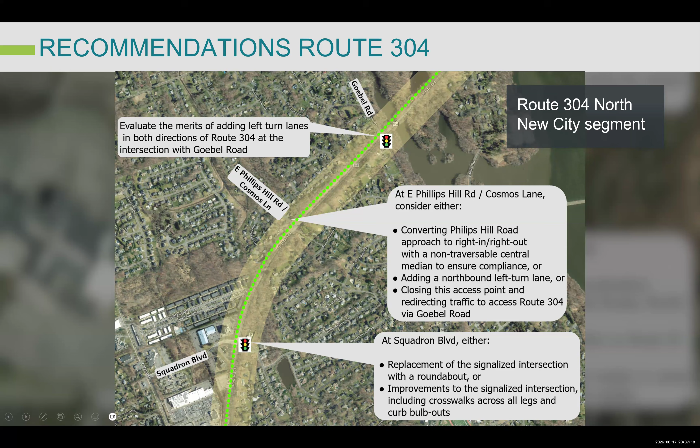Finally, at Goebel Road, we have the traffic light, but on 304, we have a single lane northbound and southbound. So all turning traffic, turning left or turning right, is in that same lane. If you're turning left, waiting to turn, you're blocking through traffic behind you. So we'd recommend here, consider putting turn lanes, both north and south on 304, to separate slow-moving turning traffic from higher speed through traffic. And with that, we've covered south to north 303, south to north 304.

I'm going to hand back to our colleague Celeste to send us to the foyer. I definitely feel like Scott deserved that round of applause for that. Good job. All right. Thank you so much.